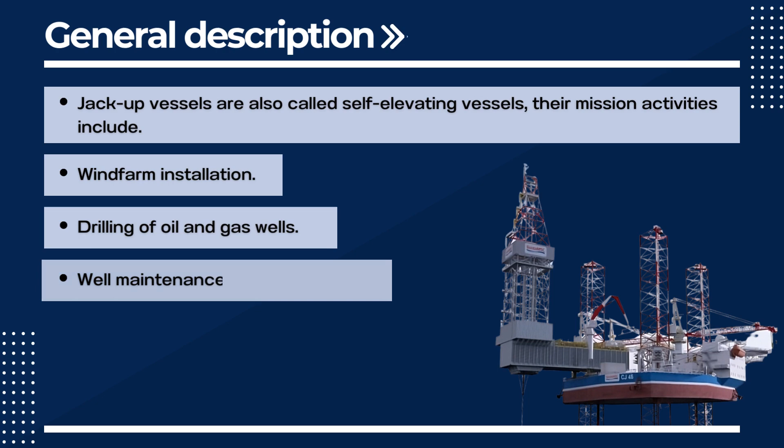Jack-up vessels are also called self-elevating vessels. Their mission activities include wind farm installation, drilling of oil and gas wells, well maintenance, offshore construction and decommissioning, accommodation.

Touchdown is the moment that the first leg makes contact with the seabed and represents the commencement of transfer of position control from the DP system to the legs. Liftoff is the moment the last leg is retracted from the seabed and represents the completion of transfer of position control from legs to the DP system.

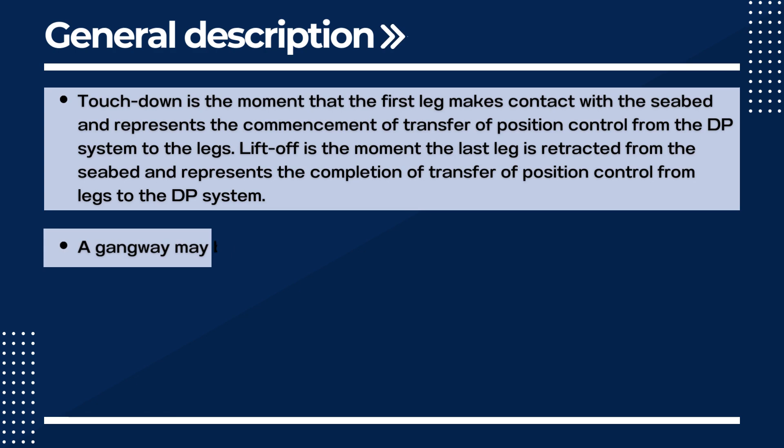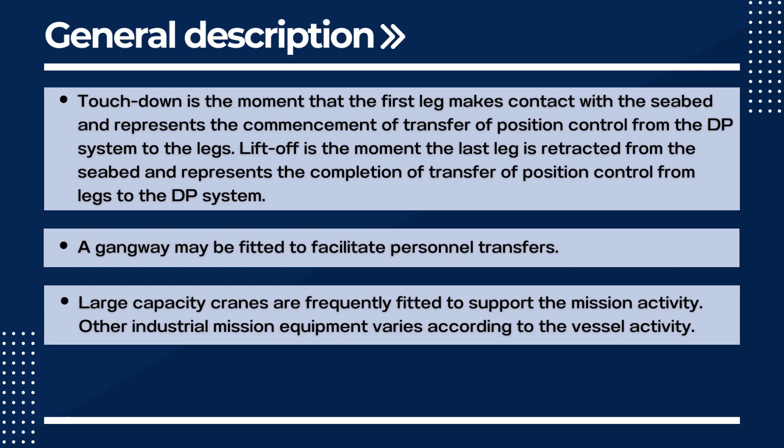A gangway may be fitted to facilitate personnel transfers. Large capacity cranes are frequently fitted to support the mission activity. Other industrial mission equipment varies according to the vessel activity. DP operations are frequently conducted in close proximity to other vessels or offshore structures prior to the lowering of the legs. High accuracy position keeping is required.

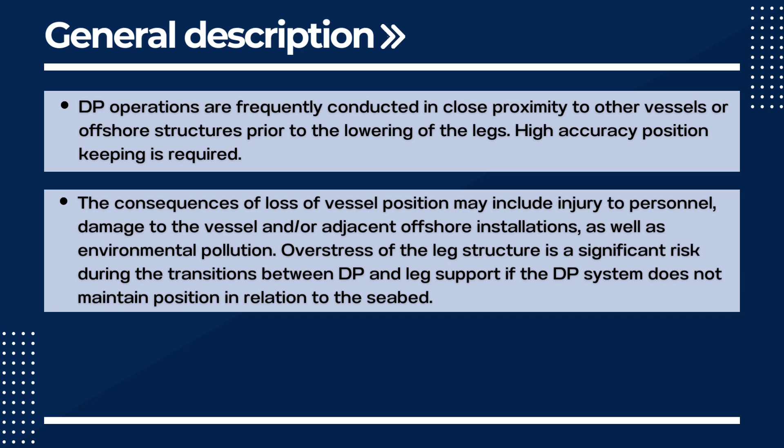The consequences of loss of vessel position may include injuries to personnel, damage to the vessel and/or adjacent offshore installations, as well as environmental pollution. Overstress of the leg structure is a significant risk during the transitions between DP and leg support if the DP system does not maintain position in relation to the seabed.

Reference systems and sensors. At least 3 independent position reference systems employing at least 2 different measurement principles should be used during touchdown and liftoff, and when in close proximity to surface or seabed structures.

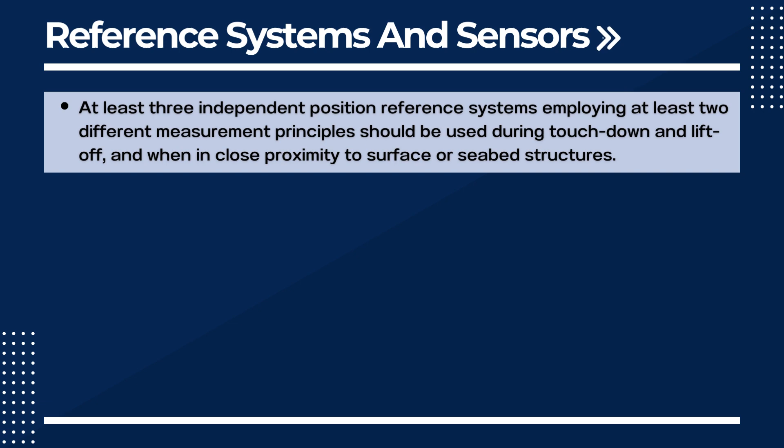Reference systems should minimize the risk of degradation during touchdown, changes in draft and changes in deployment depth of legs. These risks include attenuation of acoustic systems reception, variation in relative line of sight measurements as hull elevation varies and protruding legs interfering with satellite systems.

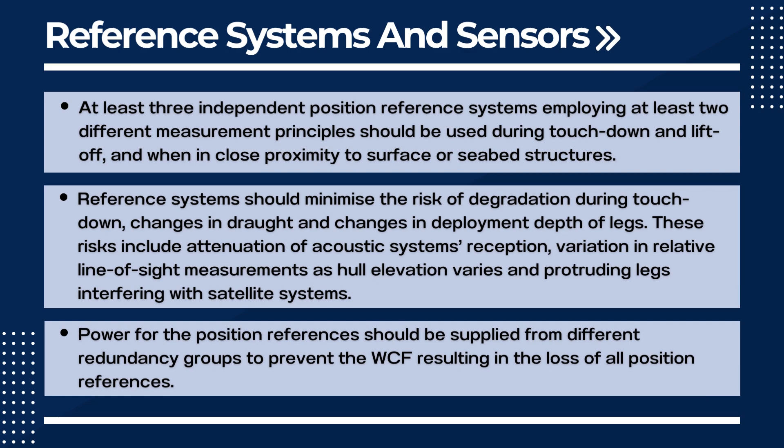Power for the position references should be supplied from different redundancy groups to prevent the WCF resulting in the loss of all position references. When maneuvering clear of other vessels or structures following liftoff, then a minimum of 2 position reference systems should be in use, with a third immediately available.

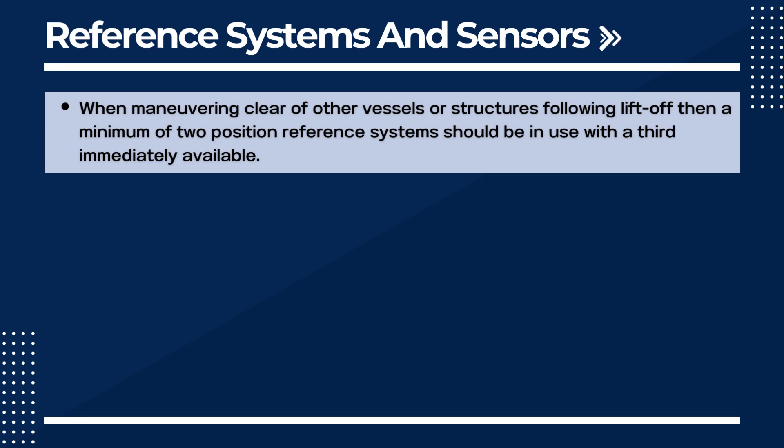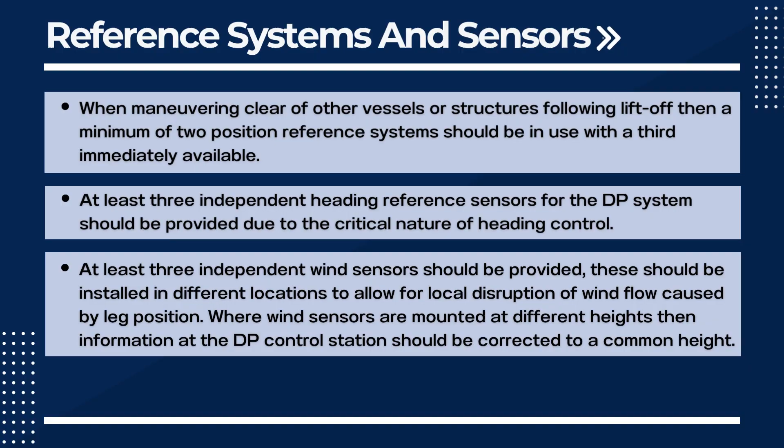Sea current vector sensors to facilitate thruster compensation for the prevailing current following liftoff. Leg position sensors to facilitate automatic modification of wind and hydrodynamic profile in the DP control system. Leg touchdown sensors to facilitate an automatic freeze of DP model integral for environment compensation and avoid overstressing the legs.

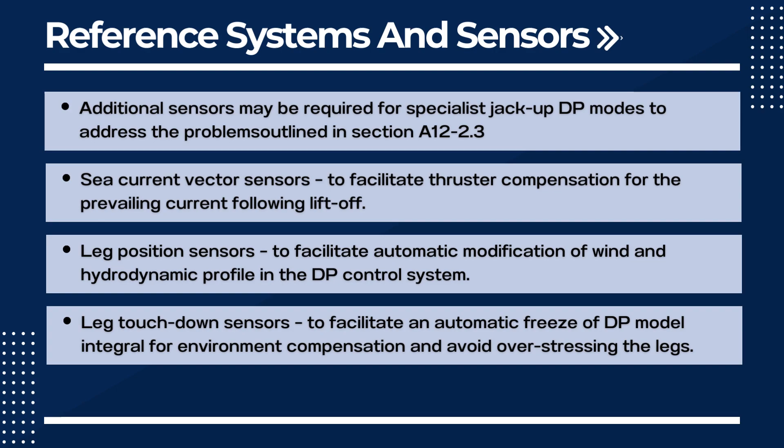The legs may be overstressed following touchdown if thruster forces are too high. Transit speed will be limited if legs protrude below the vessel hull in transit. Drag due to water flow may overstress the leg structure. Some types of position reference system may be degraded during specific phases of the jacking operation. This should be risk assessed prior to starting elevation.

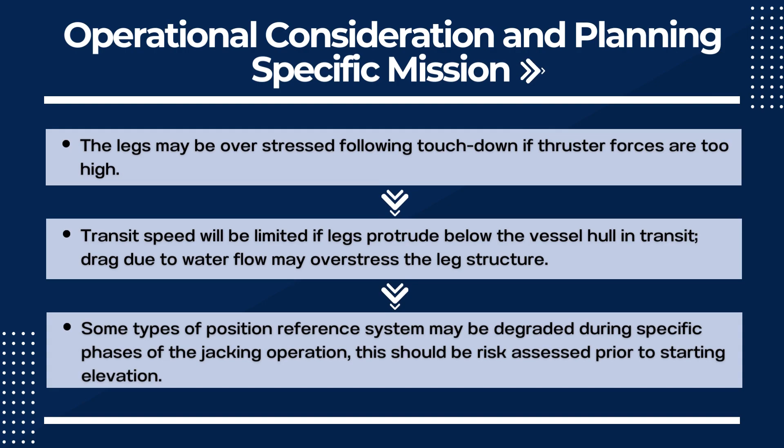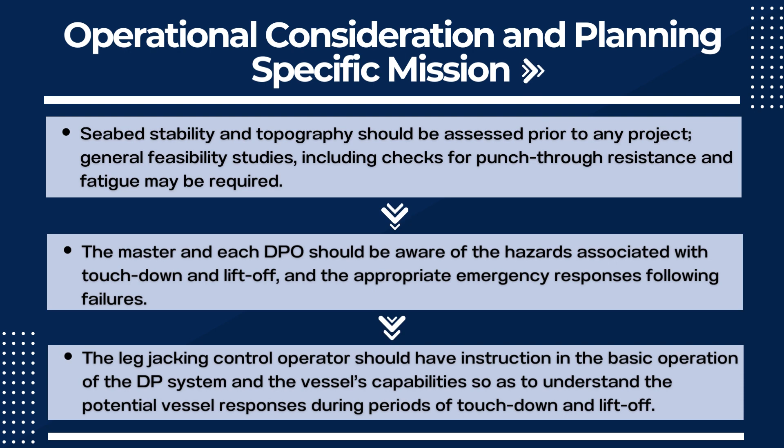The master and each DPO should be aware of the hazards associated with touchdown and liftoff, and the appropriate emergency responses following failures. The leg jacking control operator should have instruction in the basic operation of the DP system and the vessel's capabilities so as to understand the potential vessel responses during periods of touchdown and liftoff.

Operational planning. Where appropriate, the following should be documented. Risk assessment of the loss of vessel position at all stages of the operation and for all associated activities. All realistic failures should be analyzed by a project-specific risk assessment and project procedures developed as necessary.

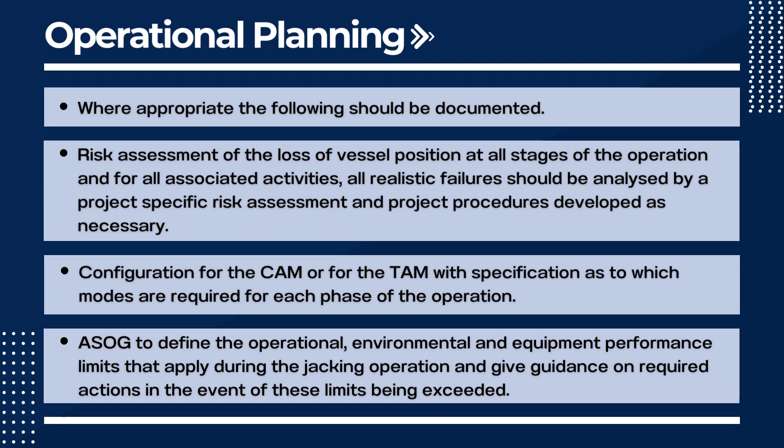Configuration for the CAM or for the TAM with specification as to which modes are required for each phase of the operation. ASOG to define the operational, environmental, and equipment performance limits that apply during the jacking operation and give guidance on required actions in the event of these limits being exceeded.